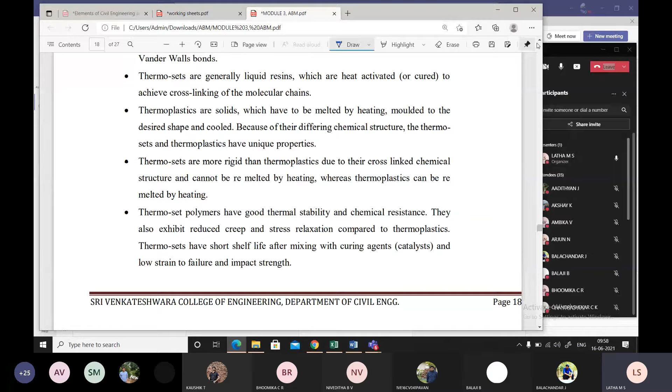In the first case, thermoplastic polymers have long molecular chains that are not chemically interconnected, but held in place by weak secondary bonds like van der Waals bonds. Whereas thermosets are generally liquid resins which are heat activated to achieve cross-linking of the molecules. So to distinguish, you can talk about the bonding between the interconnected links: how the thermoplastic is connected and how the thermoset is connected.

Next, thermoplastics are solids which have to be melted by heating, molded to a desired shape, and cooled. Because of the different chemical structure, thermosets and thermoplastics have unique properties. So thermoplastics are obtained through a heating process and can be molded into any desired shape, but thermosets are more rigid.

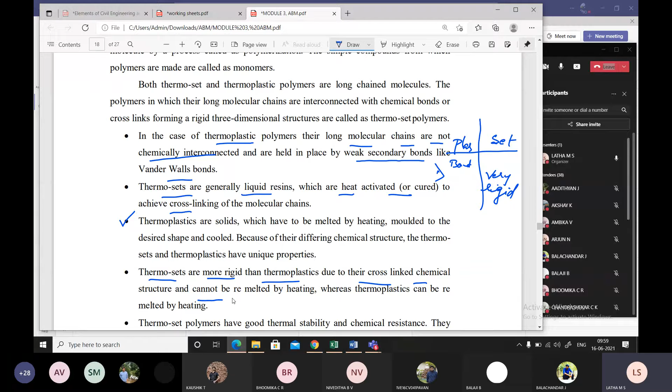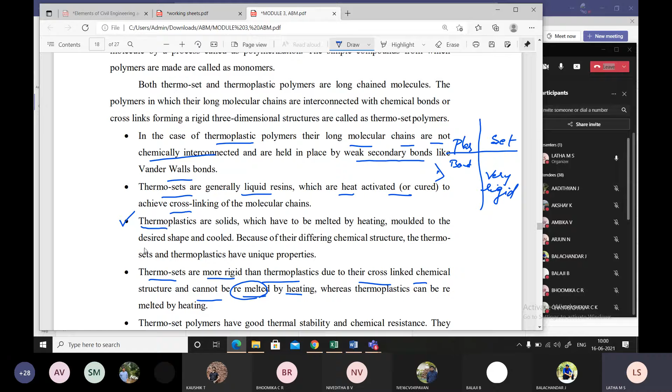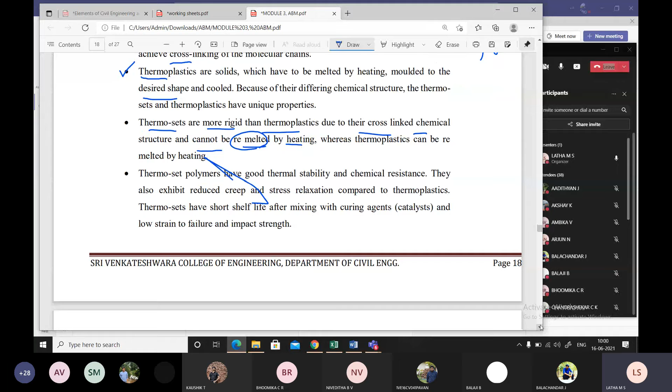Thermosets are very rigid because of their bonding property, more rigid than thermoplastics, due to their cross-linked chemical structure, and cannot be remelted by heating. Whereas melting thermoplastic again and again, you can get it into the desired shape. But in case of thermoset, it is not possible to remelt and get into the desired shape. That is the unique difference you find.

Thermoset polymers have good thermal stability and chemical resistance. They exhibit reduced creep and stress relaxation compared to thermoplastic, because of their rigid property, the creep and stress relaxation does not take place as in thermoplastics. Thermoplastic will frequently undergo creep and stress relaxation.

And one more important point is thermosets have short shelf life after mixing with curing agents, and low strain to failure and impact strength.

Why do you say, students, thermoset has a short shelf life? Can you give me a reason?

Because there is a rigorous reaction taking place between the thermoset and the agents, whatever the curing agents, catalyst, or chemical added. For example, I am using it in case of cement along with a binder. There is a definite reaction taking place between the thermoset and the cement. Therefore, it will have a short shelf life, and hence induce failure and low impact strength.

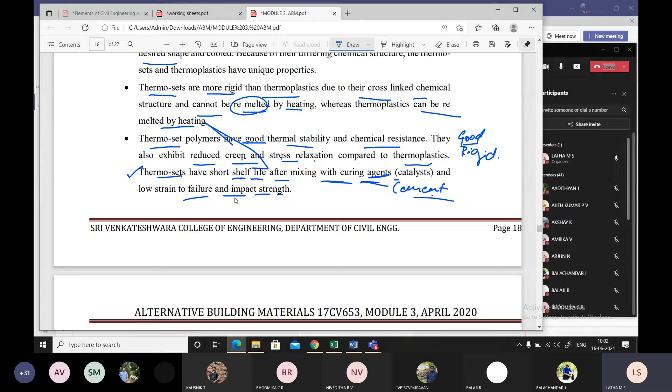Thermoplastic polymers, on the other hand, have high impact strength, fracture resistance, and strain to failure. So this is the absolute difference between the two, telling us about thermoset and thermoplastic.

Did you follow, students? Did you follow? There are 42 students in the class. Yes, ma'am. Yes, ma'am. You have to understand the difference.

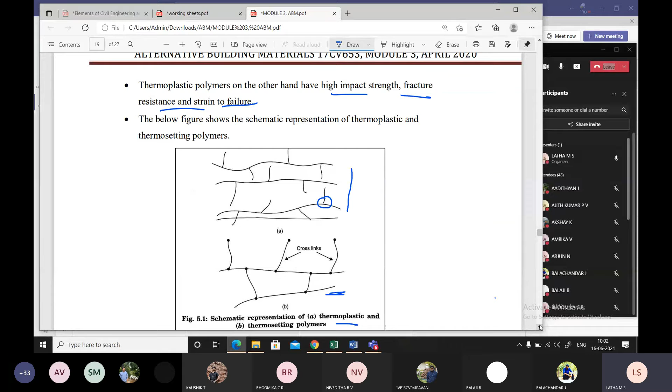This is a very important question, asking the difference between thermosets and thermoplastics. They are the polymers. So moving down further, we see thermoset polymers. What is a thermoset polymer? When I say thermoset polymers, you should get this picture of cross links and all, and they are rigid. And what type of strength do they exhibit, low strength or high strength?

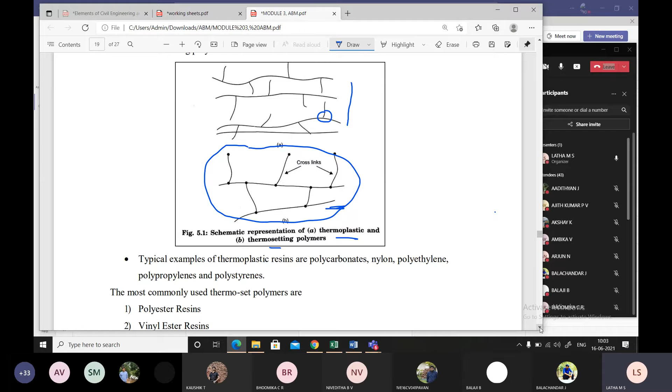Thermosets will induce a low impact strength. Very frequently it will undergo failure because of the chemical reaction taking place. It has a strong affinity towards chemical reaction, so you find the low strength.

The most commonly used thermosets: what are the different types of polymers available in the market as thermosets? Polyester resins, vinyl ester resins, and epoxy resins.

Don't forget, students, what we are talking about: alternate building materials. In alternate building materials we were looking at natural fibers and different types of fibers, then we started with fiber composites. In fiber polymer composites, we have thermosets and thermoplastics.

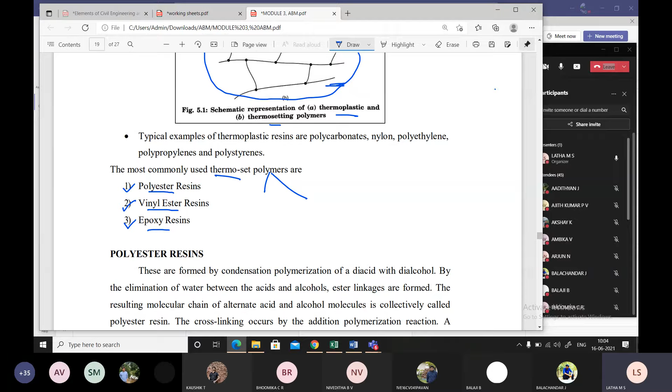In this, the thermoset available in the market is polyester resin, which induces strength towards the concrete: polyester resin, vinyl ester resin, epoxy resins. To understand each, these are all being manufactured, synthesized, a better word to say. Let us understand one by one what polyester resin is.

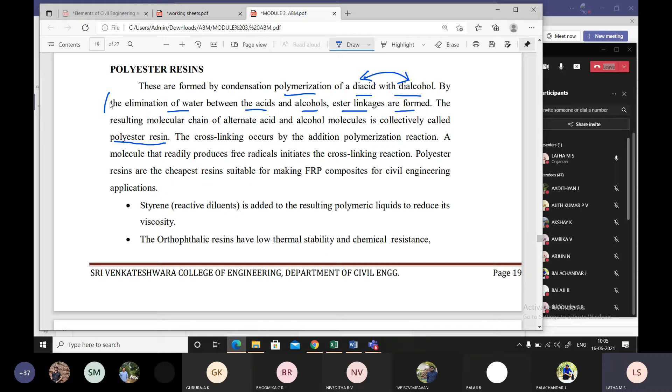They are formed by condensation polymerization of a diacid with a dialcohol by the elimination of water between the acids and alcohols. Ester linkages are formed. We require a diacid and an alcohol, and along with that we have to eliminate the amount of water content. Whenever we polymerize, some amount of water content will be eliminated between the acids and alcohols, diacid and dialcohol. Then linkages will be formed.

The resulting polymer chain of alternate acid and alcohol molecules is called polyester. Once you mix it up, this polymerization takes place between diacid and dialcohol, and some amount of water will be liberated. That amount has to be eliminated between the acids. The resulting molecular chain cannot be seen, students, it is highly microscopic. The resulting chain of alternate acid and alcohol molecules is called polyester resin.

The cross-linking occurs by the addition of polymerization reaction. Cross-linking means you have a link developed, you will find the link. A molecule that readily produces free radicals initiates the cross-linking reaction. Now we should understand how the cross-links will be developed, right? So it occurs by addition of polymerization reaction.

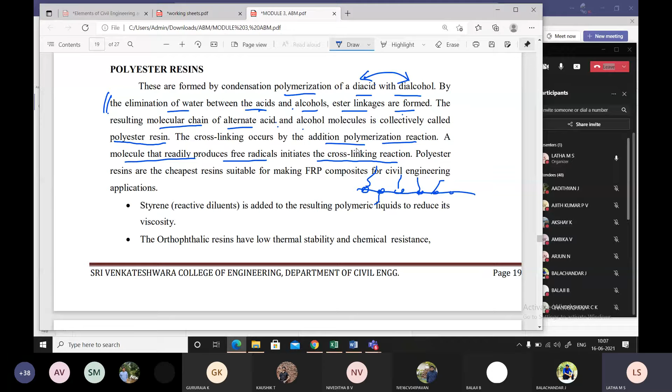It is already polymerization taking place between diacid and dialcohol, but along with that, the cross-linking occurs by the addition of polymerization reaction. The reaction is already there in the main chain, this is the main chain which is taking place, the polymerization. And already, initially when we add this diacid and dialcohol, students, there is an initiation of cross-link reaction also. So the cross-linking occurs by the addition of polymerization reaction.

A molecule that readily produces free radicals initiates. So how is it forming? You find the free radicals. The reaction, whatever is forming between the acid and the alcohol, you find some amount of radicals have been liberated. These radicals are the reason behind generating the cross-link reactions.

Polyester resins are the cheapest resins suitable for making FRP, fiber reinforced polymer composites, for civil engineering applications. I was telling you, student, in the last many classes that research has been exhausted in civil engineering. You find this is one type of plastic only, a plastic fiber. You find some plastic fibers available, you can order them online and get that. These polyester resins can be used in concrete as a fiber material.

A styrene reactive diluent is added to the resulting polymer liquid to reduce viscosity. Viscosity is nothing but flowing when it is getting heated up, because the concrete is completely alkaline in nature, students. To overcome and reduce that, some diluents will be added together along with the concrete polyester resin.

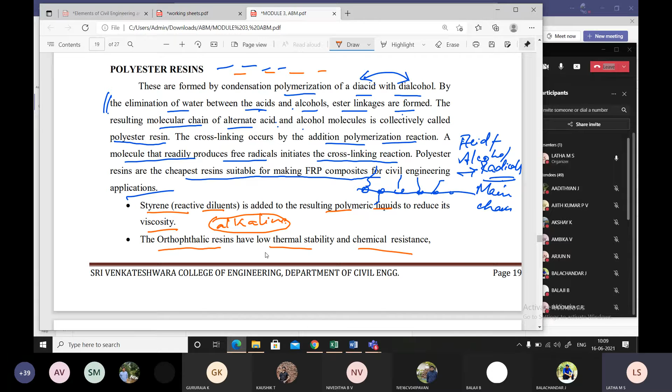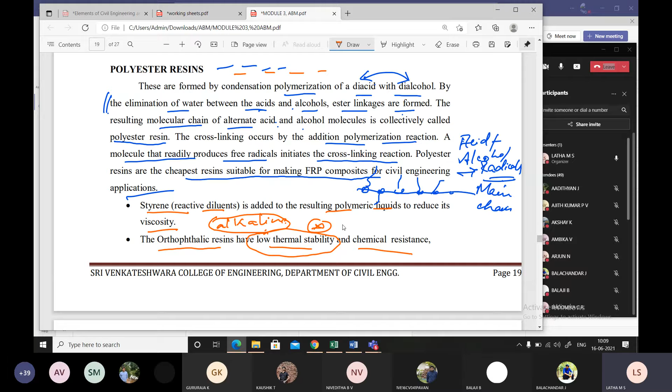The orthophthalic resins have low thermal stability and chemical resistance. This orthophthalic resin is one type of polyester resin which can be used because of its low thermal stability and chemical resistance. But low thermal resistance stability is very important, because since the concrete is alkaline in nature, you cannot think of using such a material along with the concrete. But because of its durable aspect, durability is very important, which may not be there for a longer time.

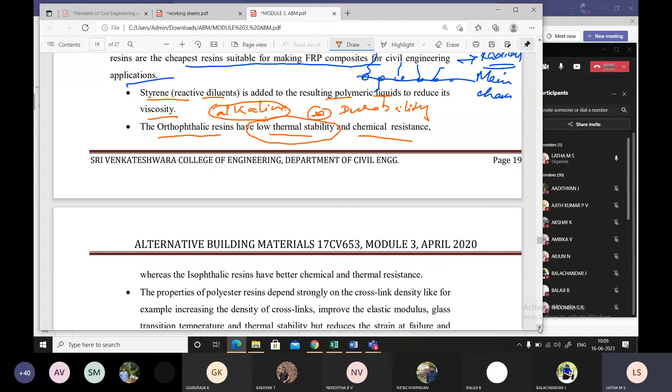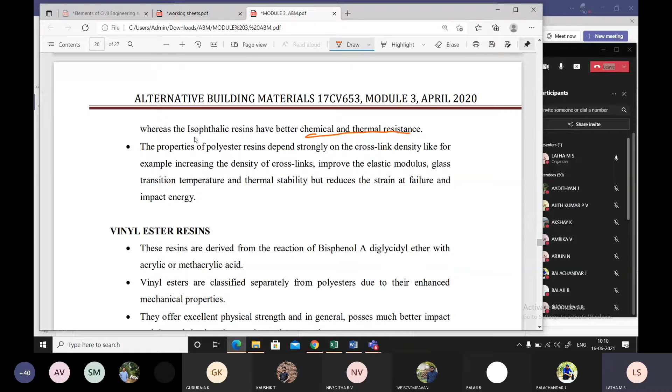So further moving down, you find even isophthalic resins which have chemical and thermal resistance. This is very much good. So isophthalic resins are also available.

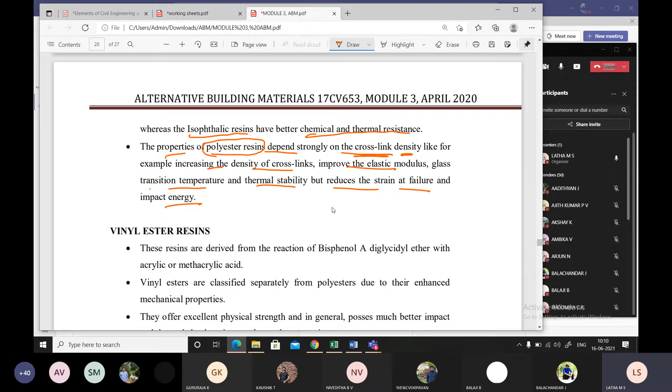The properties of polyester resins depend strongly on the cross-links, that is, on the cross-link density. For example, increasing the density of a cross-link improves the elastic modulus, glass transition temperature and thermal stability, but reduces the strain at failure and impact energy. That is the property of the thermoset, because it has reduced strain at failure and impact energy. But when using polyester resin, it has got a very good Young's modulus and density of cross-link.

Right, students, what are we discussing on? Can you tell me what we are discussing on? Anybody in the class? Anybody in the class?

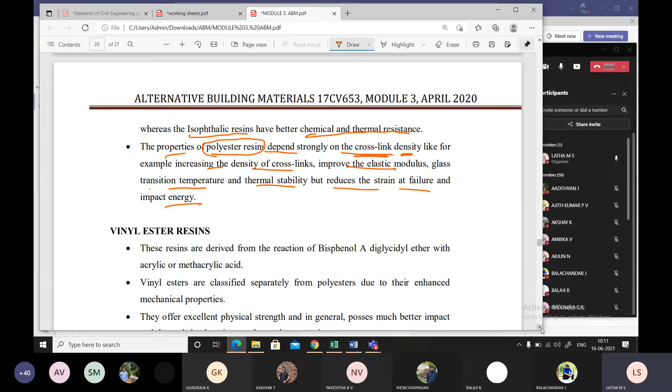Polyester resin. Yes, polyester resins. Polyester resins.

Next we'll understand what vinyl ester resins are. These are all being used in research work in concrete to improve the strength of the concrete as a polymer. Actually, in some research, they synthesize it in the lab itself, and it will be added in terms of moles, with percentage calculation of moles being done. When we want to mix this into the concrete, we have to check the mole value. That will be done at a higher level, but we'll understand what each resin is.

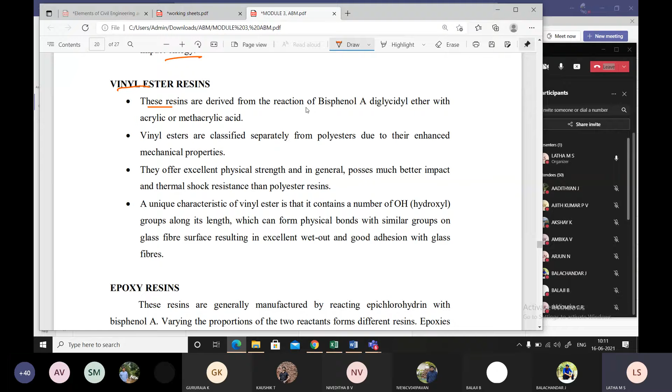So coming to vinyl ester resins, these resins are derived from the reaction of bisphenol A diglycidyl ether.

Diglycidyl ether with acrylic or methacrylic acid. So how it is being derived, you have one chemical called bisphenol A diglycidyl ether along with acrylic or methacrylic acid.

Vinyl esters are classified separately from polyesters due to their enhanced mechanical properties. So this is what we are looking for, some chemical reaction which will give us the mechanical property. Finally, what are the mechanical properties? We are measuring in terms of compression.

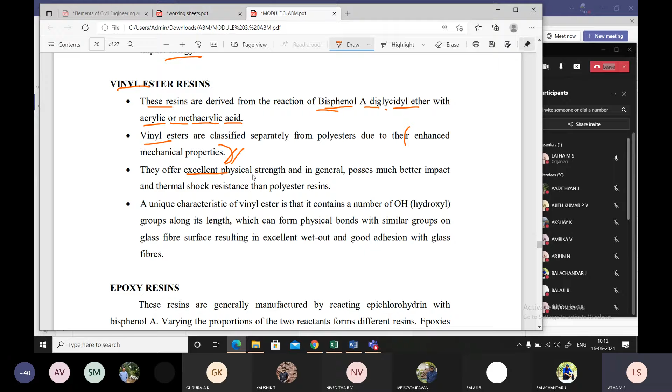They offer excellent physical strength and in general possess much better impact and thermal shock resistance than polyester resins. So this vinyl ester resin proves to be better than polyester resin in terms of thermal shock resistance and better impact strength.

A unique characteristic of vinyl ester is that it consists of OH hydroxyl group along its length. This is the chain, a long chain. You find cross links in between, connected with a strong bond. So this is a thermoset. One example of thermoset property is vinyl ester resin, which has a very good property compared to polyester resin.

A unique characteristic of vinyl ester is that it contains a number of OH hydroxyl groups. Along its length, that is, along the long chain, you find OH group being distributed, which can form physical bonds with similar groups on the glass fiber surface, resulting in excellent wet out and good adhesion with glass fibers.

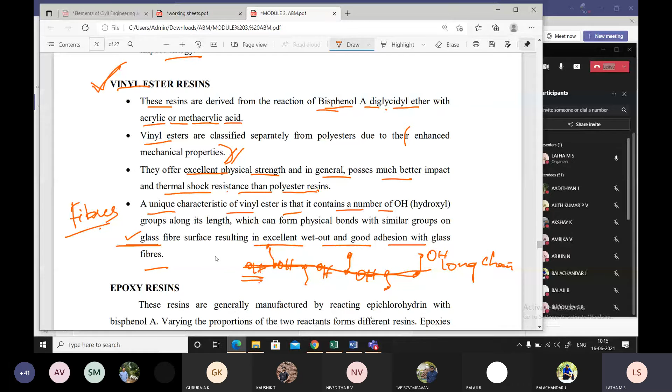I hope we discussed about glass fiber in the previous class, when we came across different fibers. So with this vinyl ester resin, because of its OH hydroxyl group present on the main long chain, a physical bond will be developed with the glass fiber. That is a very unique property of vinyl ester resins. Did you follow, students?

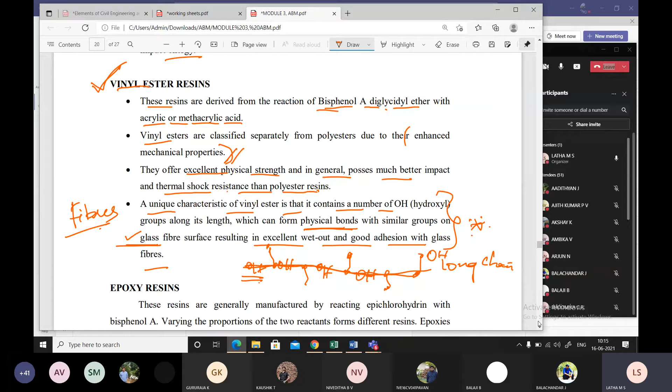We'll move on to the epoxy. Now coming to the last type of thermoset - we are talking about thermoset, not thermoplastic. In thermoset we have three different types, and coming to the last type, it is epoxy resin.

These resins are generally manufactured by reacting epichlorohydrin with bisphenol A.

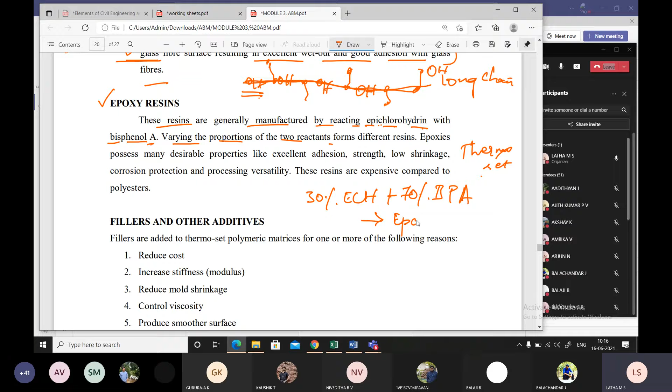Varying the proportion of these two reactants forms different resins. I can have 30% of epichlorohydrin plus 70% of bisphenol A, so I can get varieties of epoxy resins in the laboratory by keep on changing to 20%, 60%, 40%, and so on. Varying the proportions of the two reactants forms different resins.

Epoxies possess many desirable properties like excellent adhesion - adhesion is important because it has to stick on, acting like a glue. Strength, very good strength. Low shrinkage is very good, and corrosion protection and processing versatility. So it has very good properties like adhesion, strength, low shrinkage.

Processing versatility is nothing but having good durability throughout the process. These resins are expensive compared to polyesters, because with very good properties you find they become expensive in nature.

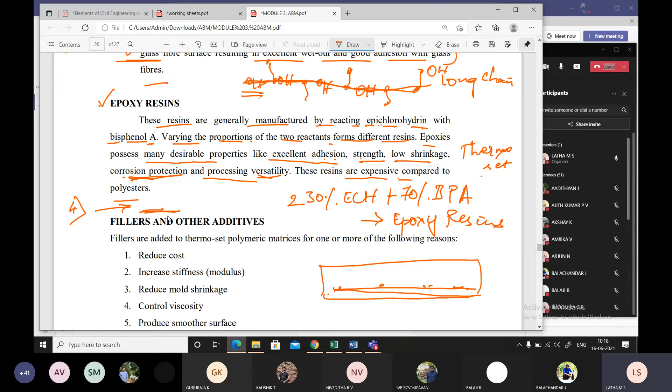So these are the three different types of resins, or types of thermosets, available in the market which can be used. The fourth type - you may say, ma'am, why only three types? The fourth type you can think of at your research level, referring to some chemicals favoring construction. So, what are the three different types of thermosets, students?

We find three different types: polyester resins, vinyl ester resins, and epoxy resins. Based on their chemical reaction and their initial properties, they vary from each other.

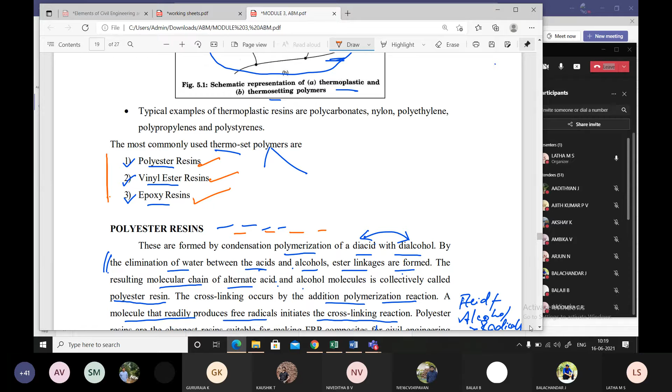Is that all clear to you, students? Yes or no? Yes, ma'am. Yes, good.

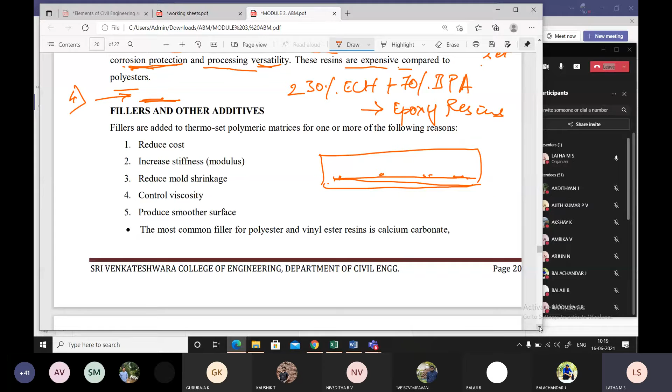Thank you. Now coming to the next, fillers and other additives. I cannot keep thinking about one material only in terms of polymers. I have to think about the fillers, how these fillers will act, what are the functions of the fillers.

Fillers and other additives, like you have a polymer, you should have a filler together to make a complete polymer. Fillers are added to thermoset polymeric matrix for one or more of the following reasons.

That is for one of the following reasons: reduced cost, increased stiffness, reduced mold shrinkage, control viscosity, produce smoother surface. These are the very important filler functions.

For what purpose am I using fillers? It is only because of reducing cost. I cannot have the chemical reactions or the reactants throughout. If I say this is a polymer, I cannot have a chemical reaction throughout. I should have, along with this, some filler materials. If I'm having only chemical reaction throughout, it is very costly.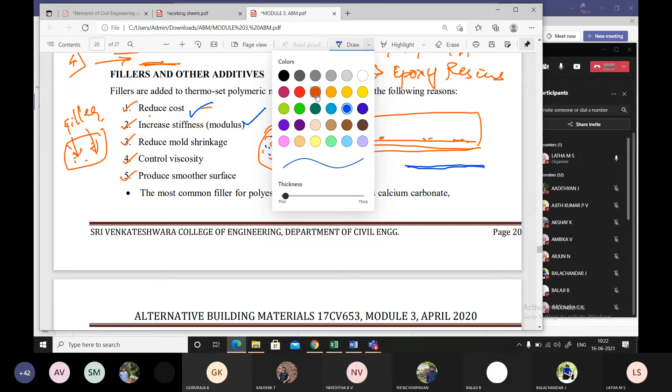Now, if you take the bubble gum and try to expand it, apply tensile load on either side, it will easily get expanded, isn't it? Shrinkage will be, sorry, elongation. Let me talk about elongation. Elongation will be X.

Now I'll take the same bubble gum and take one wooden plate attached to it. Students, I'm nailing these two together. I'm taking the same bubble gum here, fixing it to the wooden plank, and nailing together.

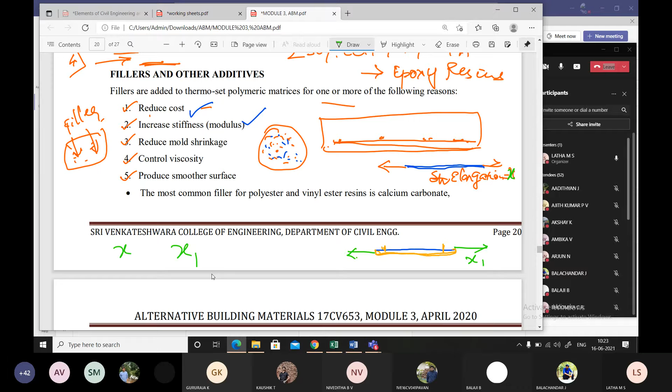Now I'll apply a tensile force only. I'll call this one X, and this one to be X1. Now tell me which one will be having a greater elongation. You got my question, students?

I take a bubble gum which is having an elastic property and apply some load. It will stretch, let me call that elongation as X. That's only the bubble gum. Next, I'll take a new bubble gum and stuck that bubble gum to a wooden plank. I'll apply the load, and that will stretch to X1.

Now which extension or elongation will be maximum? Either X will extend more or X1 will extend more. X. Yes, X will extend more because it is pure, it is having no resistance, whereas X1 is having resistance because of the wooden plank.

So that is how reduction in elongation is taking place. In the same way, when I'm adding some fillers, reduction in shrinkage also will take place on the same basis. And for example, the polymer will have viscosity.

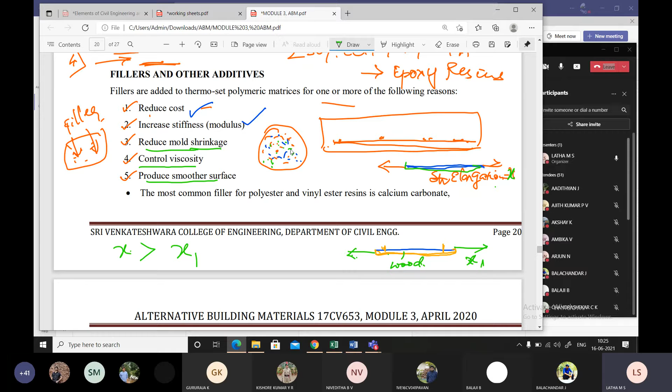And produce smoother surface. Definitely, when I'm adding a filler material to the polymer, the surface will be improved, a smoother surface will be induced. So why we are adding fillers to the polymers, these are the basic reasons.

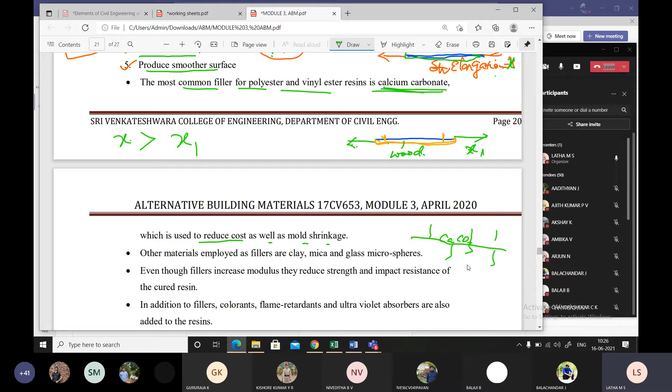The most common filler for polyester and vinyl ester resin is calcium carbonate, which is used to reduce the cost as well as mold shrinkage. What is added along with this polymer? You have a polymer like a chain with cross links, and along with this we add calcium carbonate, CaCO3. So what happens? All the properties will increase for the polymers.

Other materials employed as fillers are clay, mica, and glass microspheres. Mica, what is this material in geology? They are very thin sheets, which you would have come across in your school life. These thin sheets are made of silica only in nature. But this mica has to be added with pozzolana, then only it is possible to use it as a pozzolana material.

And glass microfibers, students, microspheres you find available in the market. They are very, very minute in structure, but we don't advise anybody to use that at undergraduate level. However, you can use it as one of the resources as a pozzolana, but we have to handle that glass microspheres very carefully.

Even though fillers increase modulus, they reduce strength and impact resistance of cured resin. Why will it reduce, students? Because we are talking about thermoset polymers. What is the basic property of thermoset polymers? They have low impact energy, low strain. Why? Because of the high chemical reaction taking place to form the bond. All the contribution of the chemicals is towards the bonding taking place within the polymers, so you find the low strength or strain taking place in thermosets. We are talking about thermosets here.

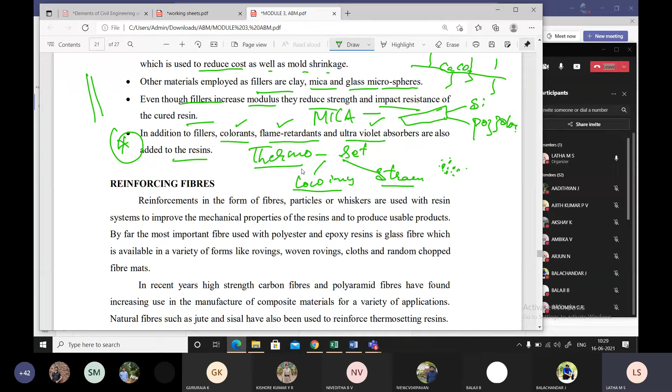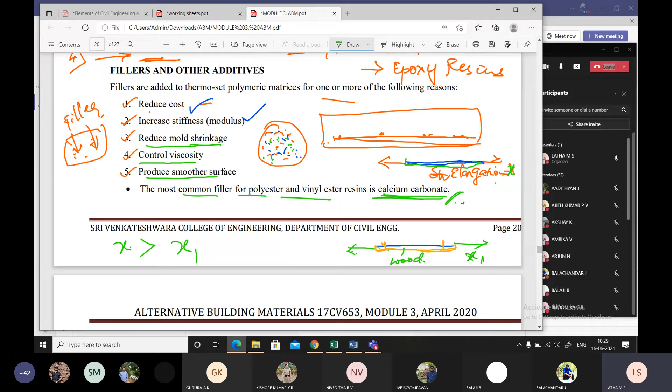Did you all understand, students, how to increase the strength of polymers? What are the different types of polymers? They are thermoset and thermoplastic. In thermoset, you have three types, and how to improve the properties of these thermoset types? We can use a filler material. What is the purpose of using filler material? It is the basic property for which you have to look for as a filler material, and as a filler material we are talking about calcium carbonate. Did you all follow, students?

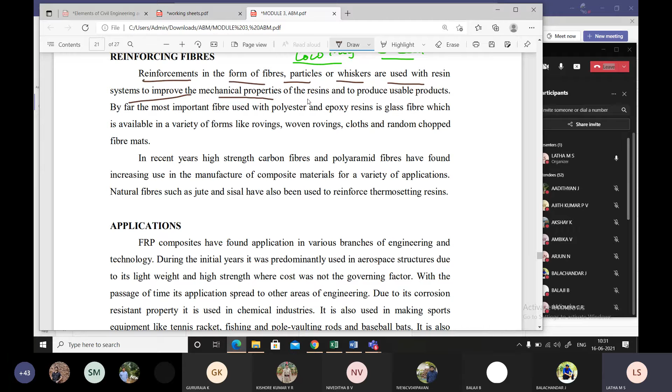Next we'll move on to reinforcing fibers. Reinforcements in the form of fibers, particles, or whiskers are used with resin systems to improve the mechanical properties of resins and to produce usable products. So to improve the properties, we have to use some reinforcing fibers along with the resins to improve the mechanical property. By far the most important fibers used with polyester and epoxy resins is glass fiber, because epoxy resins and polyester can have that addition or bonding made easily with glass fibers.

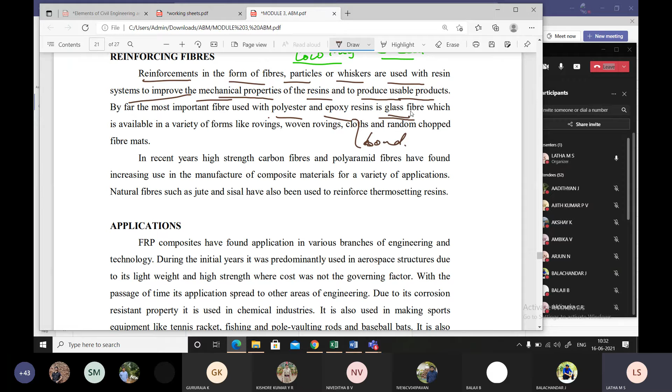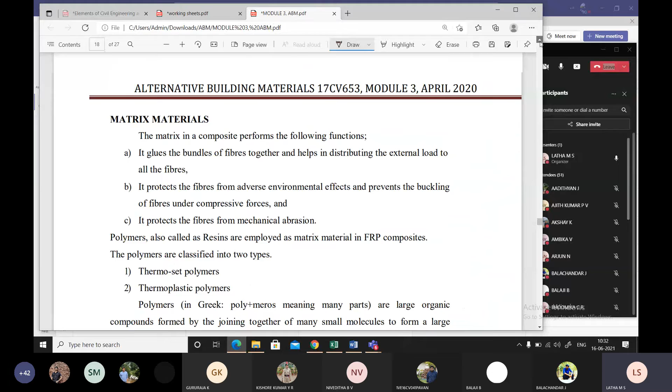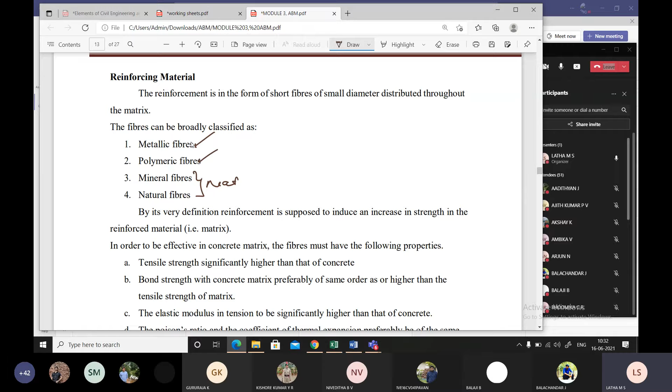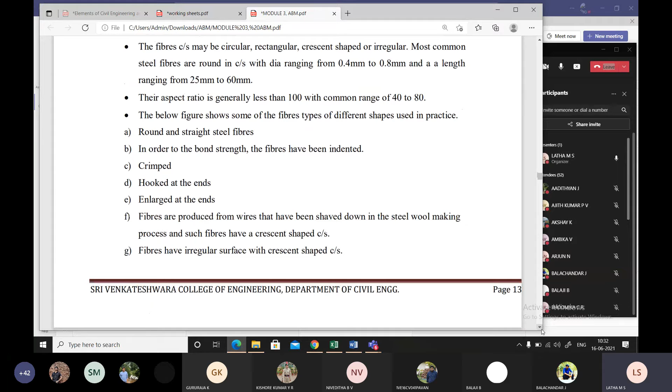Glass fibers, you remember, students? I'll take you through the different types of fibers - mineral fibers, natural fibers. We haven't discussed those, but we discussed polymeric fibers and metallic fibers. Mineral and natural fibers are the naturally existing fibers. Metallic fibers and polymeric fibers we have discussed, and glass fibers - I think somewhere we spoke about glass fibers, am I correct?

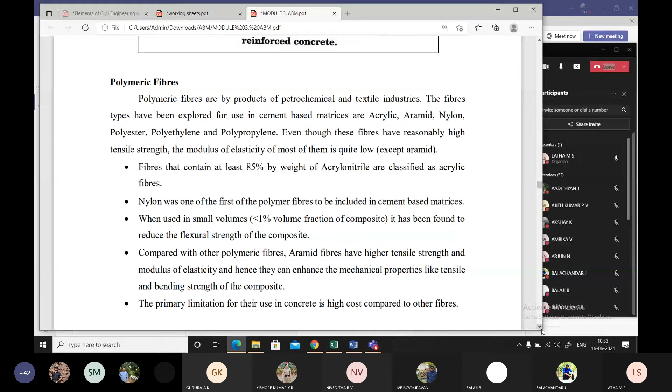Under mineral fibers, E-glass and soda lime glass fibers were employed to reinforce cement-based composites. Both E-glass and A-glass fibers are found to lose their strength in the alkaline environment because they don't exhibit alkaline resistance in nature. The need for alkaline resistance resulted in the development of alkaline resistant glass, AR glass, to overcome this limitation.

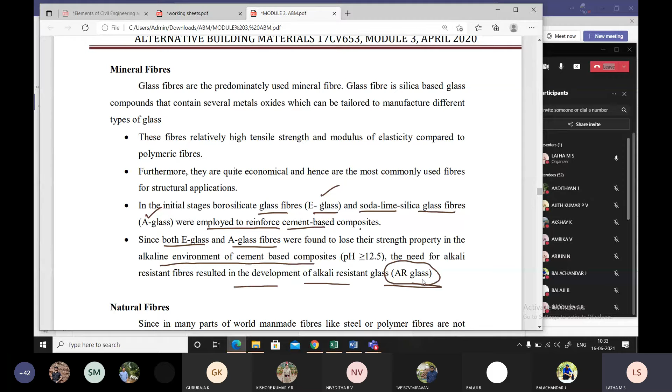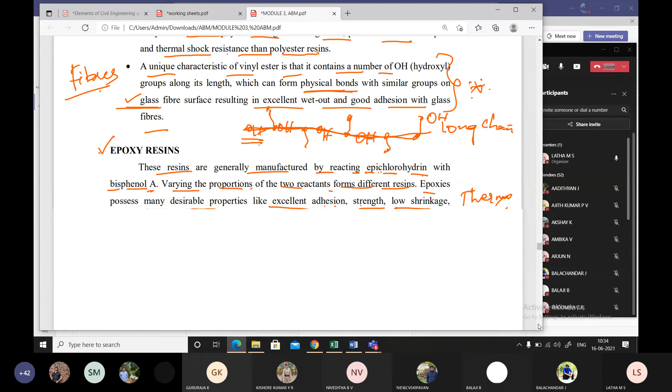Keeping this glass fiber in mind, polymer resins are very much gelled with glass fibers. Glass fiber is available in a variety of forms like rovings, woven rovings, cloths, and random chopped fiber mats. You find these glass fibers available in rolling mats that you can purchase in the market or book online, in any form you want.

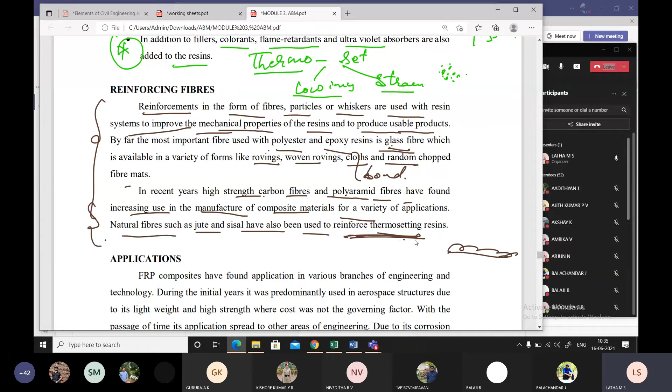In recent years, high strength carbon fibers and polyaramid fibers have found increasing use in the manufacture of composite materials for a variety of applications. Natural fibers such as jute and sisal have also been used to reinforce thermosetting resins. These are the different types of fibers used in polymers, especially glass fibers in different varieties, and natural fibers like jute and sisal, only to increase the strength and density of the fibers, which is the basic necessity of fibers.

FRP composites have found application in various branches of engineering and technology. Due to their corrosion resistant property, they are highly recommended in chemical industries. They are also used in sports equipment like tennis rackets, in biomedical engineering, and FRP rods have been used in reinforcing concrete.

That is what pultruded FRP rods are used for. You find concrete spread in a beam with reinforcement inside, and around the reinforcement we have to use these resins because they are highly corrosion resistant, while reinforcement gets corroded very easily. So to overcome that, we use FRP. But there is a challenging task in this.

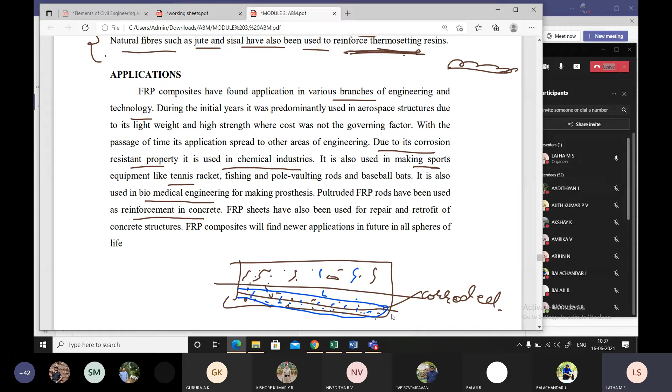In the beam, concrete is spread out uniformly throughout, and similarly these resins spread out uniformly, with FRP rods embedded throughout. Instead, you can have a duct and keep the resin within the margin of the reinforcement so that it is protective against corrosion. If you search Google for FRP, you'll find a number of papers coming out, students, no need to worry about it.

Further, the next topic is regarding building materials from agro and industrial waste. I'll be talking about this in the next class.

Any doubts, students? Anything for discussion? Building materials from agro and industrial waste — agro means agricultural and industrial waste.

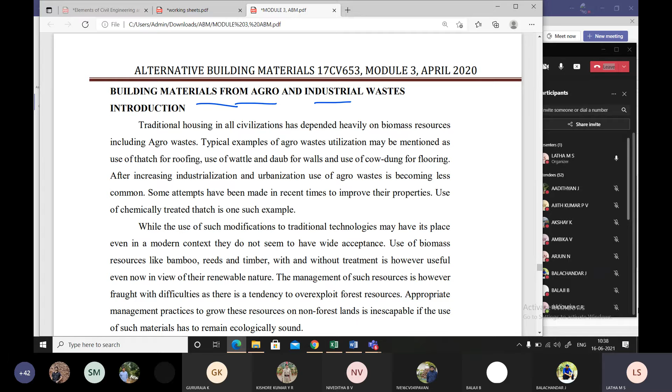Bhumika, you are there in the class? Bhumika? Yes, Bhumika? Guraj is on phone, I'll remove this. Bhumika is not there in the class? Manoj? Manoj? Ambika? Yes ma'am, yes? You mentioned something? Ambika? Now Ambika, give me a question, frame a question. Ambika, you can frame a question on the topic we discussed right now in this class. We discussed so many topics, right? Now frame a question so that other classmates will answer it. Question goes to Ambika.